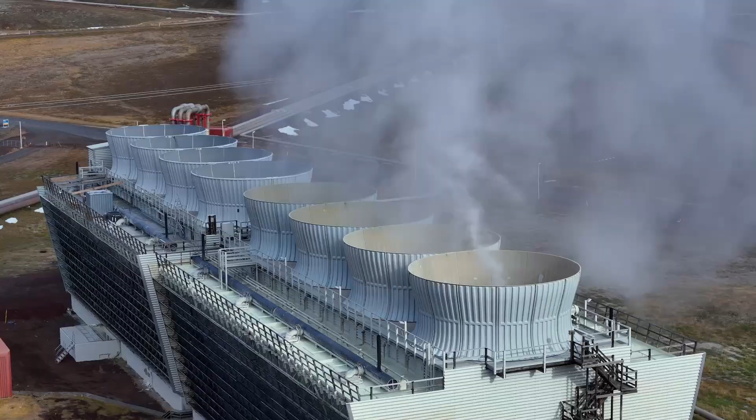Every time you look up a question, stream a video, or load a web page, somewhere a server is working for you. And that work generates heat, a lot of it. A large data center can consume over 100 megawatts of electricity, enough to power a small city. Most of that energy ends up as waste heat, blown into the atmosphere by cooling systems that exist for one purpose: getting rid of it.

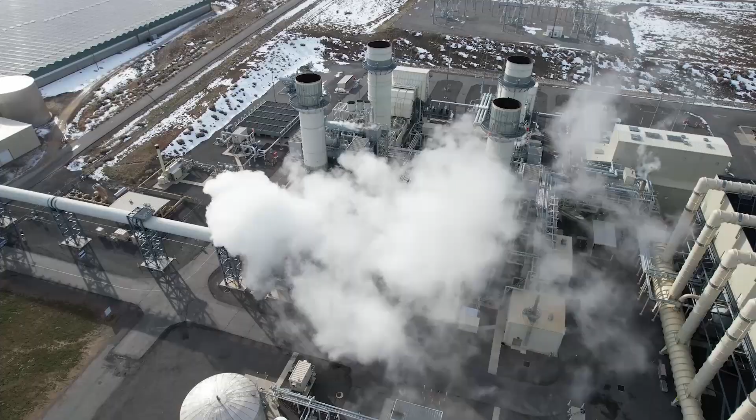But what if that waste heat wasn't waste at all? To answer that question, we need to talk about a working fluid that behaves unlike anything in a conventional power plant: supercritical carbon dioxide.

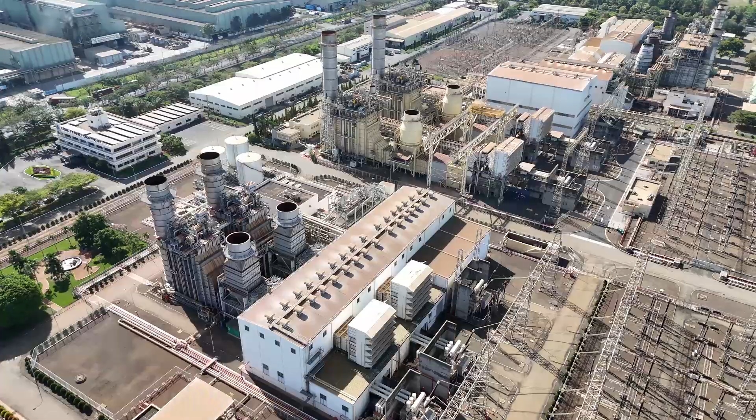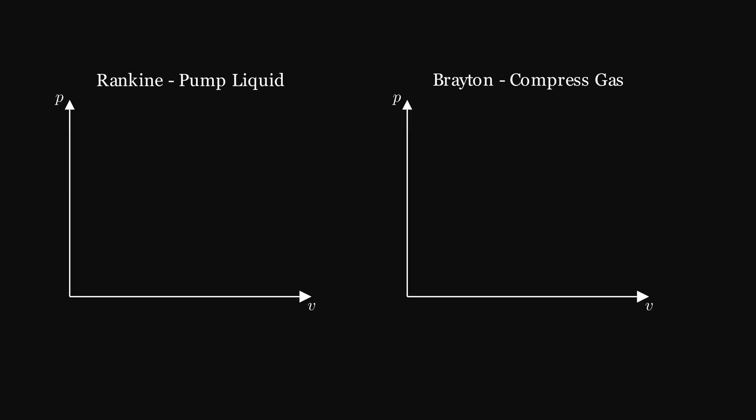There are two classical ways engineers turn heat into work: the Rankine cycle, which moves a fluid through liquid and vapor phases, and the Brayton cycle, which compresses and expands a gas continuously. The key difference between them comes down to compression. On a pressure versus volume diagram, the shaft work required to compress a fluid is the integral of V dP, the area swept between the compression path and the pressure axis. Let's look at the area for each cycle.

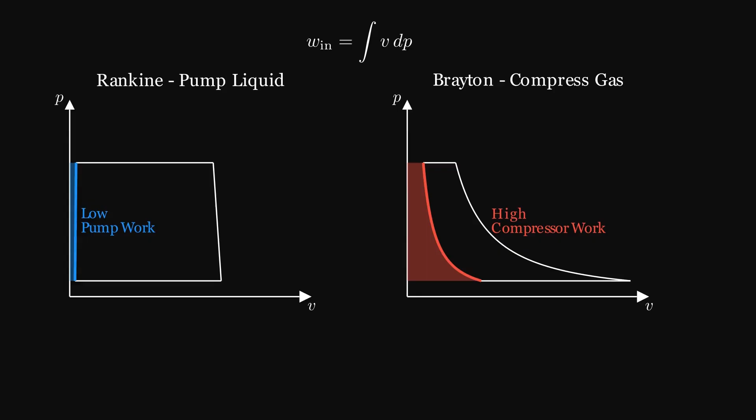Liquid-specific volume is roughly 2 orders of magnitude smaller than gas-specific volume at comparable pressures. The difference shows up directly in the work integral, and directly in the back work ratio, the fraction of turbine output consumed just by compression. In a gas turbine, up to 80% of what the turbine produces goes straight back into driving the compressor. And that is the work the cycle generates but never delivers.

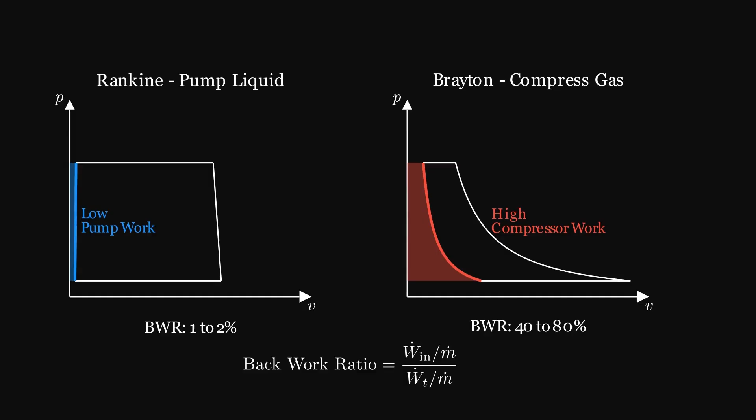So the question becomes, is there a fluid you can compress almost like a liquid but still expand through a turbine like a gas? Every pure substance has a critical point, a specific temperature and pressure beyond which the distinction between liquid and vapor ceases to exist. To understand what that means, let's build a phase diagram from scratch.

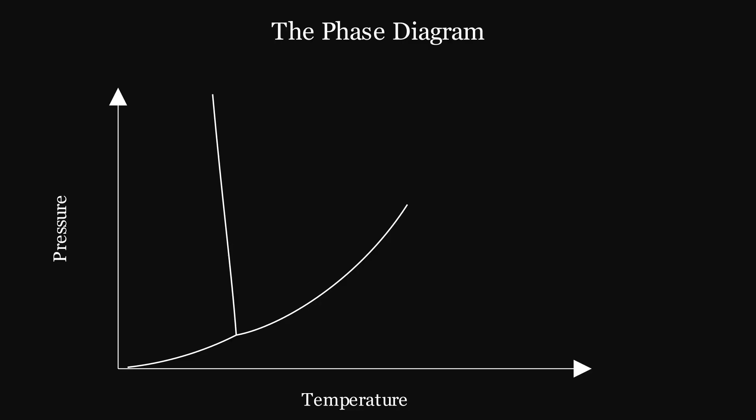At low temperatures and high pressures, the substance is a solid. As we cross this boundary, the substance melts into liquid. The liquid-vapor boundary is the saturation curve, followed upward as pressure and temperature both rise, and it terminates. That termination is the critical point. Below it, heating a liquid at constant pressure eventually causes it to boil, which is a sudden, discontinuous jump from liquid to vapor. Properties like density, specific volume, and enthalpy change abruptly at that boundary.

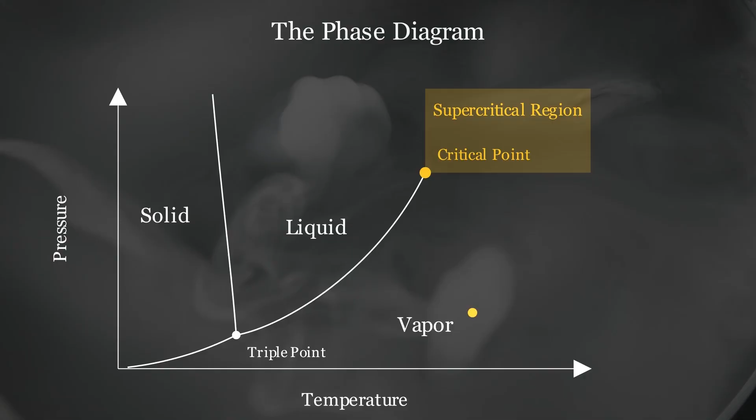Above the critical point, that discontinuous jump never happens. But the significance is not just the absence of a phase boundary. It is that you can move continuously from a liquid-like state to a gas-like state, with no abrupt change in properties at all. Density, specific volume, enthalpy all change smoothly. There is no boiling, no condensation, no sudden transition. Just a single fluid whose properties shift continuously with temperature and pressure.

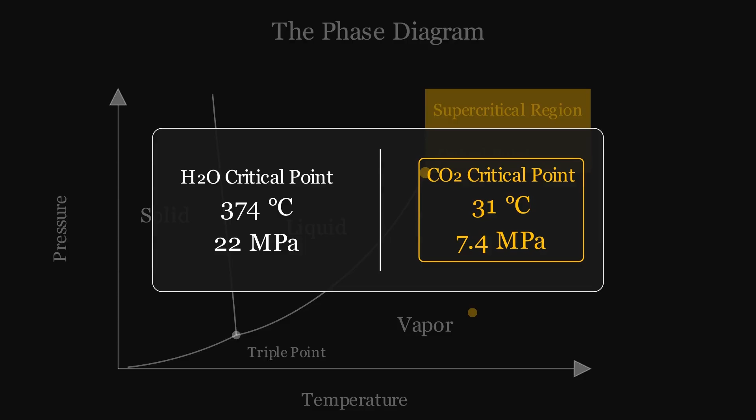Now here is what makes CO2 special. The location of the critical point is a fixed property of each substance, and it varies enormously. For water, the critical point sits at 374 degrees Celsius and 22 megapascals. Conditions so extreme, they demand specialized materials throughout the entire system. For CO2, the critical point is at just 31 degrees Celsius and 7.4 megapascals. That's just above room temperature at a pressure that is high but industrially achievable.

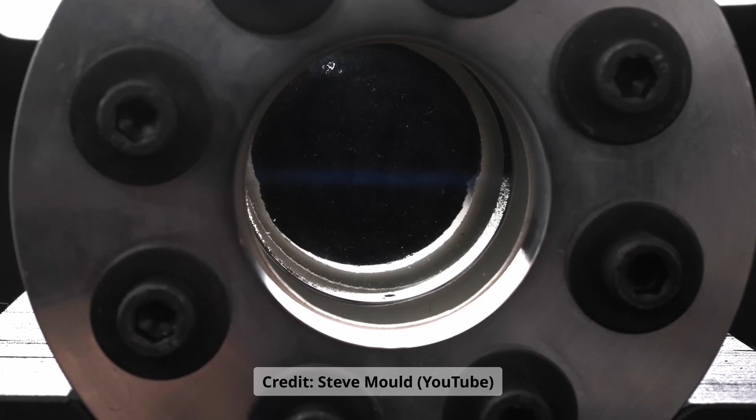Watch what happens when CO2 is brought to its critical point in a sealed tube. The boundary between liquid and vapor, that sharp meniscus, simply vanishes. What remains is a single, uniform fluid that is simultaneously dense like a liquid and expandable like a gas. This is supercritical CO2, and that dual nature raises a precise question. What does it actually cost to compress a fluid in that state?

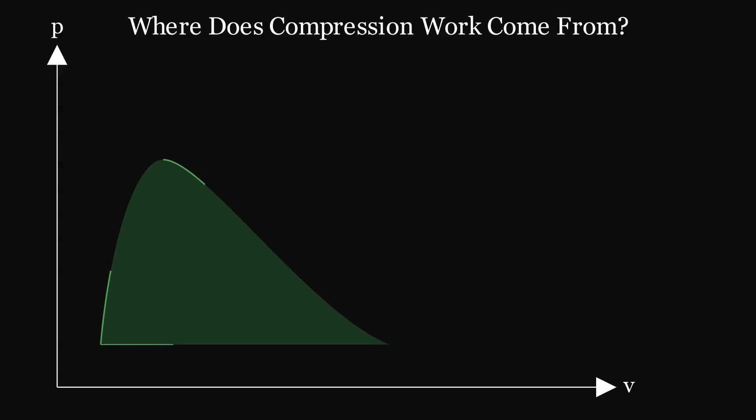For an open flowing system like a compressor, the work per unit of mass is the integral of V dP between the inlet and exit pressures. That integral is the area swept between the compression path and the pressure axis. So what matters is the size of V, the specific volume during compression. Bigger specific volume means bigger area, means more work in.

Look at the isotherm right at the critical point. Near that inflection, the slope approaches zero. The curve goes nearly flat. That means a large rise in the pressure produces almost no change in specific volume. The fluid is so dense at that condition that it behaves far more like a liquid than a gas, and compressing a liquid costs a fraction of the work.

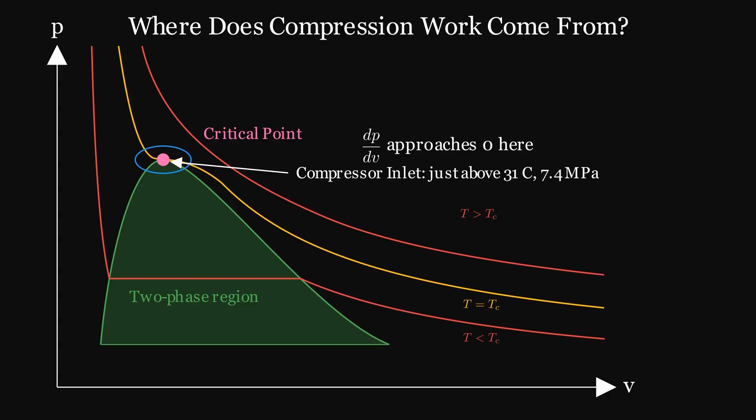Let's zoom in on that region and put some real numbers to it. Note that this diagram flips the axes, with the pressure along the bottom and specific volume up the side on a log scale.

We are looking right at the neighborhood of the critical point, from 80 to 160 bar. The 31.5 degrees Celsius isotherm, just above CO2's critical temperature, traces along the bottom. At that condition, specific volume is roughly 0.0015 cubic meters per kilogram. The green region beneath it is the compression work, the unavoidable baseline.

Now look at the red region stacked above it. That is the additional work penalty at just 41.5 degrees, only 10 degrees warmer. At that condition, specific volume has climbed to around 0.004 cubic meters per kilogram, nearly 3 times larger. Since compression work is the integral of VdP, 3 times the specific volume means roughly 3 times the work.

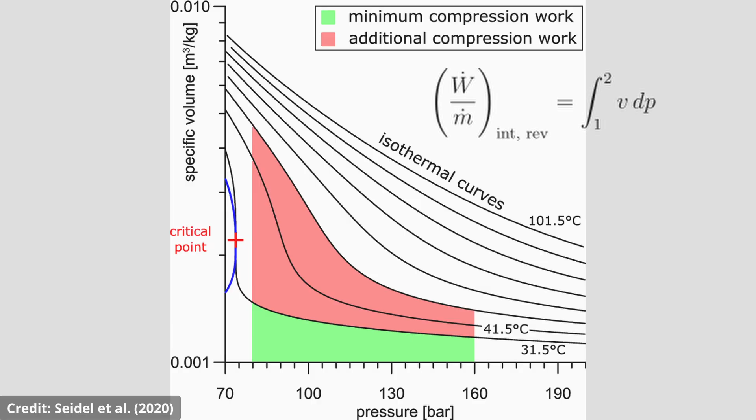Staying closer to that lower isotherm is exactly what the cycle is designed to do, and the payoff shows up directly in how much of the turbine's output you actually get to keep. We've seen why supercritical CO2 compression costs less on the PV diagram. Now let's see what that means for the full cycle on the temperature versus entropy diagram, because this is where the full cycle consequences show up.

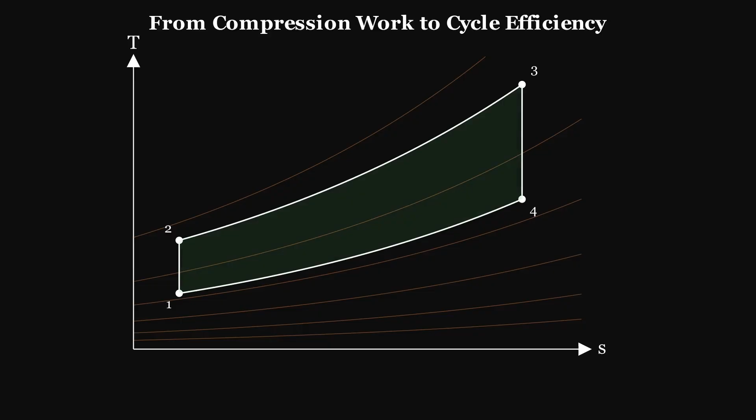For a standard air Brayton cycle, the isobars fan apart significantly on the TS diagram. That fanning reflects how much enthalpy rises during compression in a gas. At backwork ratios of 40 to 80%, a large fraction of turbine output goes straight back into driving the compressor. The net work, the enclosed area, is what remains, and it works out roughly to 55% of turbine output once you account for real-world component losses.

Now look at the supercritical CO2 cycle on the same axes. Near the compressor inlet, right at the critical point, the isobars are pinched tightly together. That compression is the near flat region we saw on the PV diagram, now showing up here as a short, shallow rise in enthalpy. The backwork ratio drops roughly to 25%, and the net work fraction climbs to around 75%. The turbine output is comparable, the heat input is comparable. What changed is that compression term.

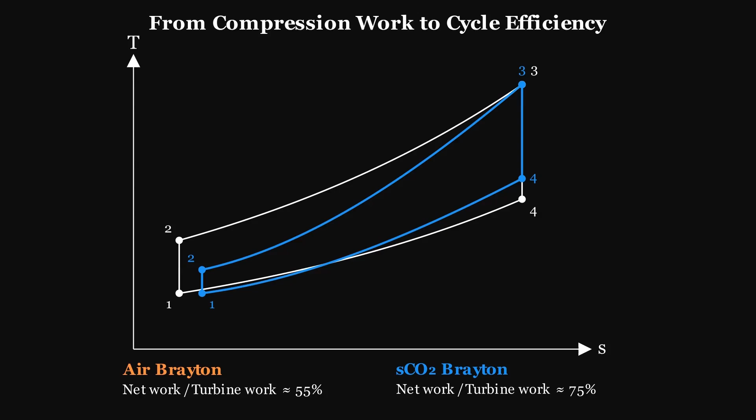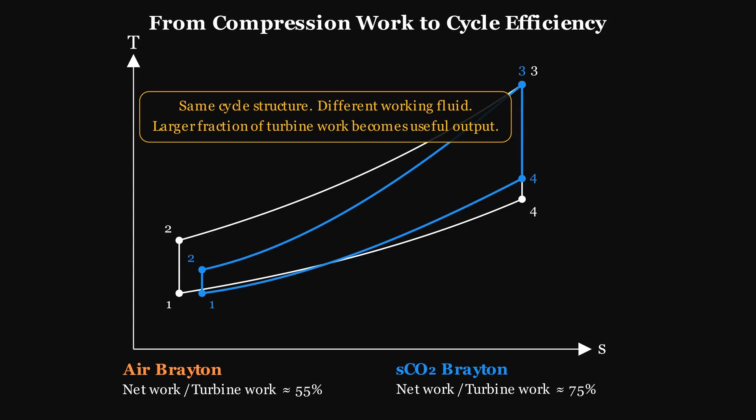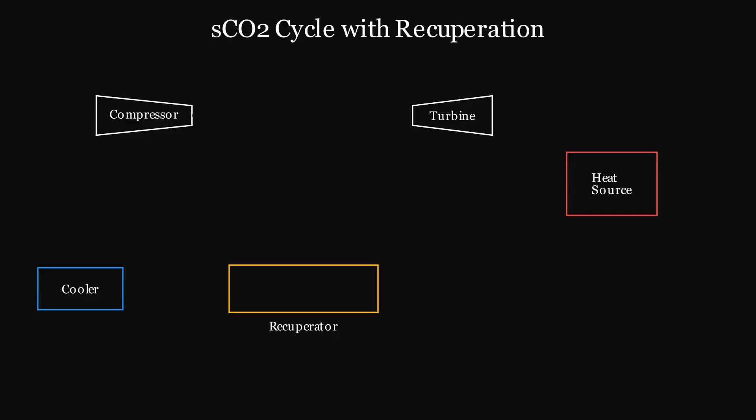Same 4-process cycle topology as Brayton, same basic thermodynamic structure, but by operating CO2 near its critical point, the cycle keeps far more of what the turbine generates. The difference comes entirely from where on the phase diagram the compression happens. There is one more modification that real supercritical cycles always include, and it compounds the efficiency gain significantly. It is the same principle as regeneration in a gas turbine.

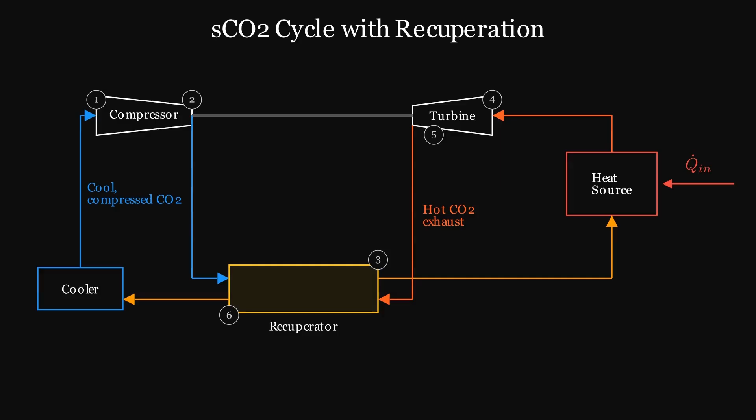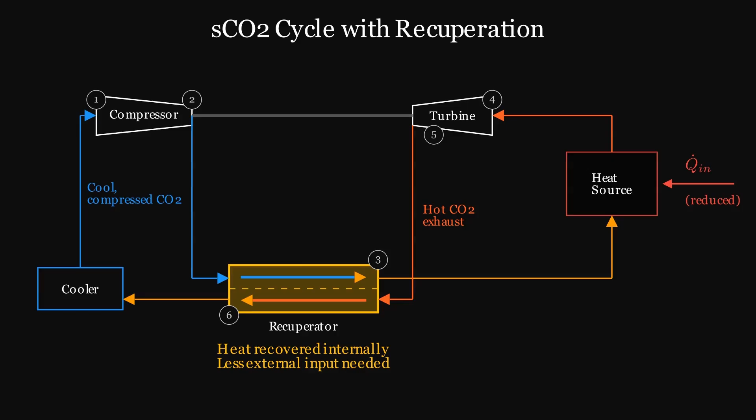In a supercritical CO2 cycle, the turbine exhaust exits at a high temperature, too valuable to simply discard. So before that heat is rejected, it preheats the compressed CO2 on its way to the heat source. That internal heat exchanger is called the recuperator. The external heat input drops because part of the energy is recycled within the cycle itself. In a well-designed supercritical CO2 system, the recuperator can recover a large fraction of that turbine exhaust energy, pushing projected thermal efficiencies above 50%, competitive with or exceeding the best supercritical steam plants.

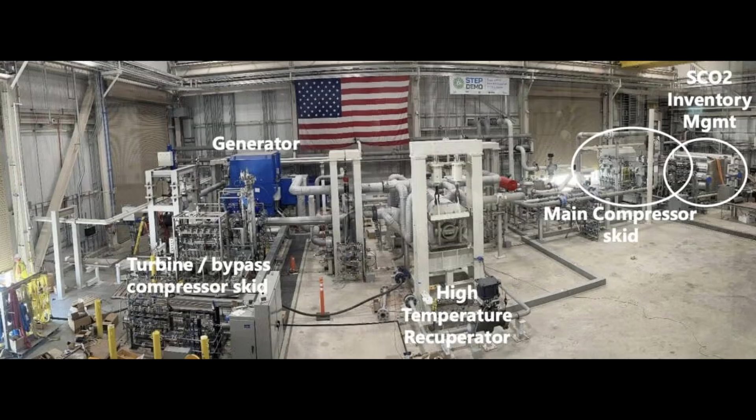So where does this actually go? Start with what has already been built. In San Antonio, the STEP demo facility completed phase 1 testing in 2024. The turbine ran at 27,000 RPM, reached 500 degrees Celsius, and delivered 4 megawatts net to the grid. That turbine produces the equivalent of roughly 21,000 horsepower and weighs under 100 kilograms. Anyone used to steam plant scales would not recognize it.

While the US was validating the technology, China moved to commercial deployment. In December 2025, the world's first commercial supercritical CO2 power plant connected to the grid. Named Chaotan One, 2 15-megawatt units at a steel plant in Guizhou province, running entirely on sintering exhaust that would otherwise be lost. Compared to the steam recovery system it replaced, it delivers over 85% higher generation efficiency and more than 50% greater net output, which brings us back to where we started.

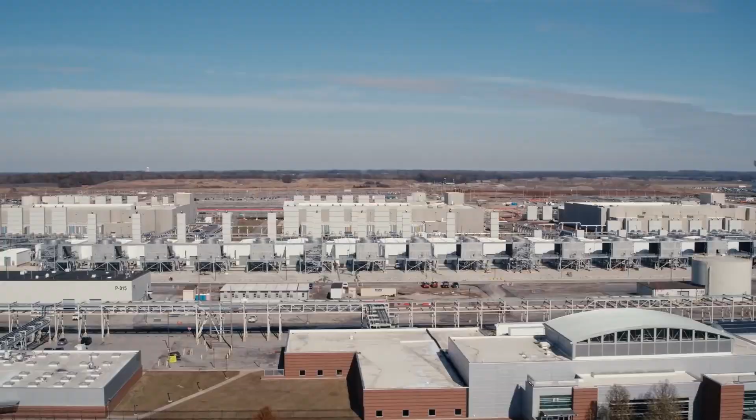Whether a compact supercritical cycle can turn industrial waste heat into grid power is no longer an open question. The temperatures here are lower and that engineering work is ongoing, but the thermodynamics transfer. Those numbers on the chart are not about better materials or more advanced combustion. They're about compression and where on the phase diagram it happens. That is the answer to the question from the opening.

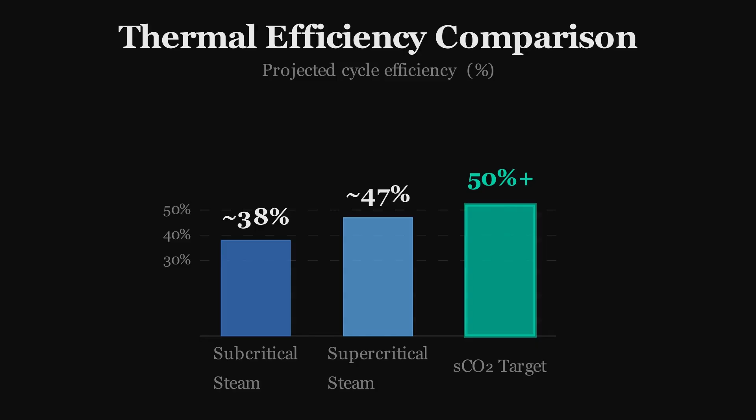But CO2 got here because its critical point happened to sit at an accessible temperature and pressure. Other fluids have critical points too, which makes you wonder, what else is sitting on that phase diagram, waiting for the right cycle to be built around it?